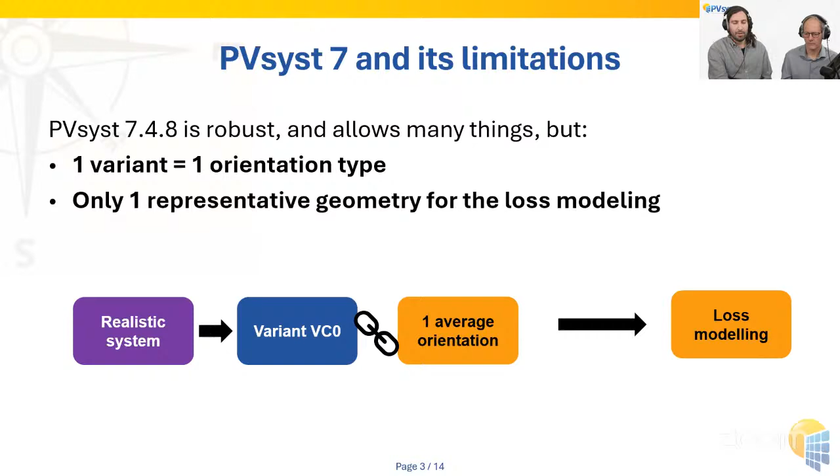And so for that reason, we may have had some inaccuracies due to this averaging, and this motivated us to develop version 8. The solution was rather simple: to allow for any number of orientations to be described in the same variant. This solves both problems. We can now model both trackers and fixed tilt in the same variant, or different types of fixed tilts and so on. We can also have more accurate modeling because each orientation is represented properly in the variant, and we can use that for the loss modeling.

So let's now look at this in practice. I'm going to bring PVsyst out and let's see with a project we prepared here.

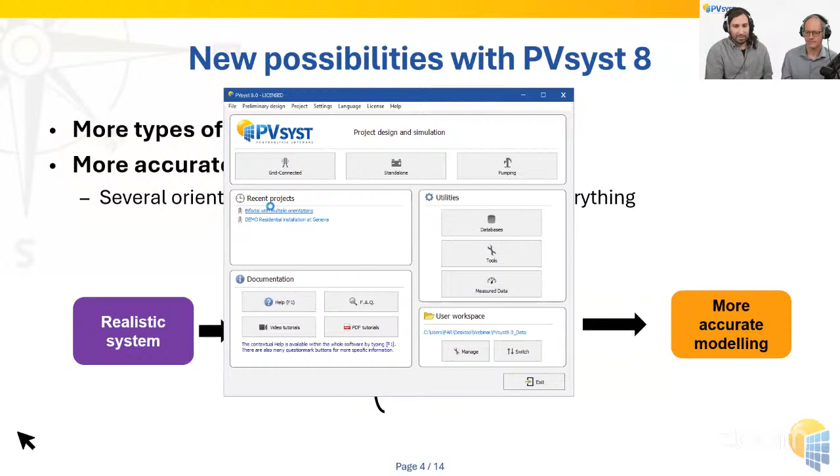And I'm going to open this first variant. All right, so first let's enter the orientations because that's where the main improvement is.

You can see that the interface compared with version 7 has changed a little bit in that we now have a list of orientations. With all the space that is here below, you can see that you could add many more, and there's actually no limitation to how many there are.

So here we have two fixed tilt orientations, which we can see at a glance. And to change the parameters, you can just unfold and enter any parameters here. Here, these are grayed out because I have a 3D scene that's linked to this orientation.

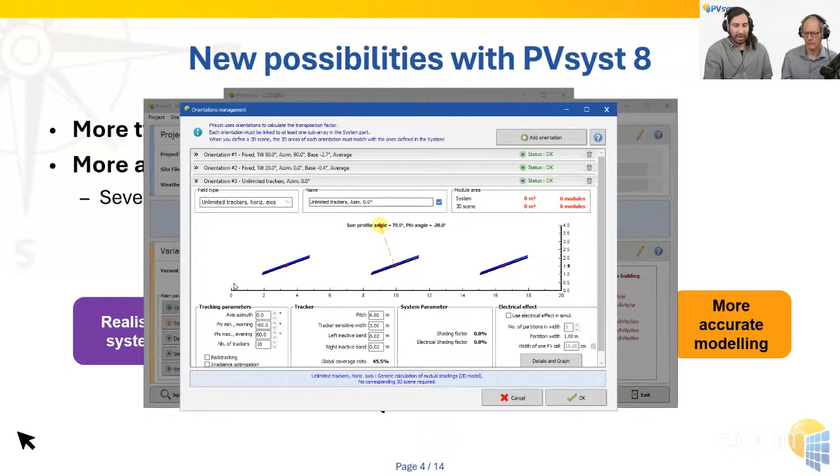So the nice thing about this is that I can very simply add an orientation. And here, since I had fixed tilt, let's add trackers orientation, for example. And here I have no problem, I can change the different parameters. And let's add backtracking, for example, and press OK.

And now I would like to show you a simulation. So just to complete my system, I should define which modules are on this tracker orientation. So I'm going to go to the system.

So here, for PVsyst 7 users, you will notice that the subarray list is on the left. Let me just copy one of these subarrays, which means I will just copy the definitions of the modules and the inverters. So I have my third subarray, and I can now select the trackers orientation.

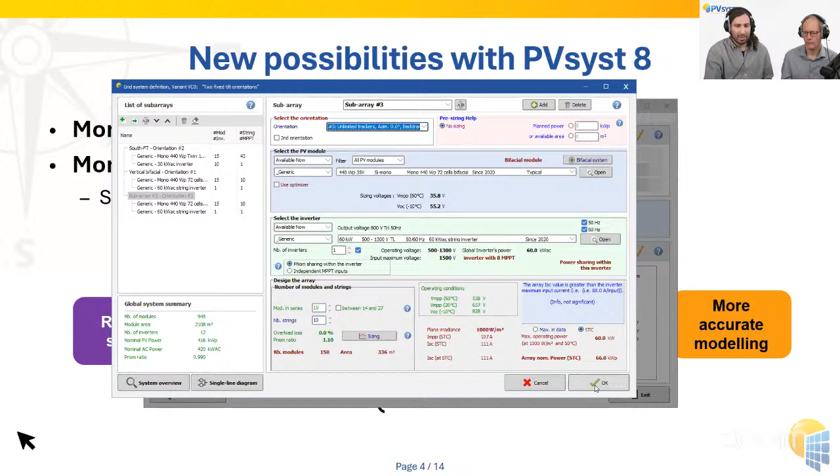And so with this, I'm ready to go. I have a module, an inverter, and strings, which are defined for every orientation. And I can just run the simulation.

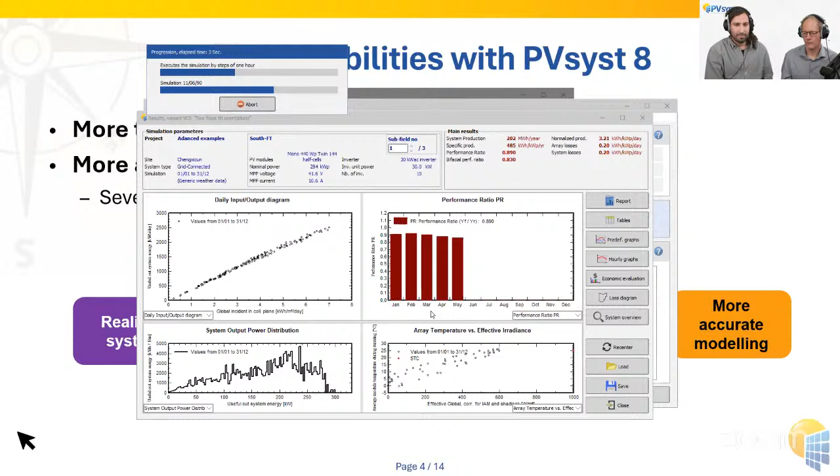And so what I did here, you can do with any number of orientations. Every time you have a new orientation, you can basically have new parameters. So you could imagine many differences, for example, electrical differences or differences in the 3D scene and so on. So now if you check the report, all those differences will be described.

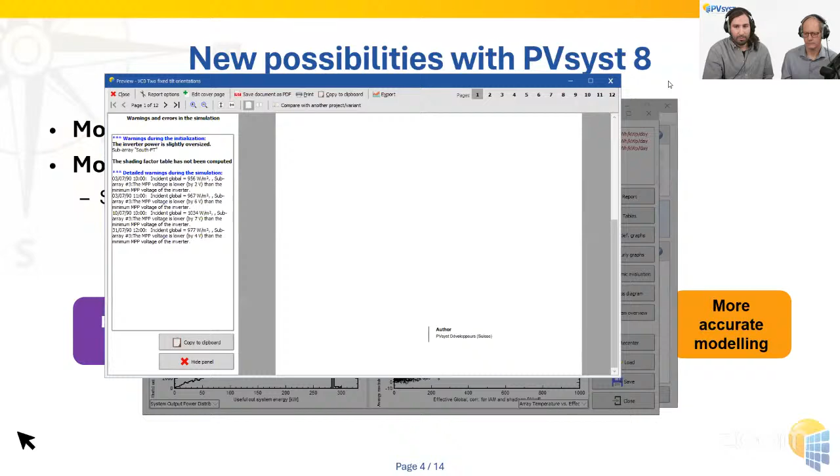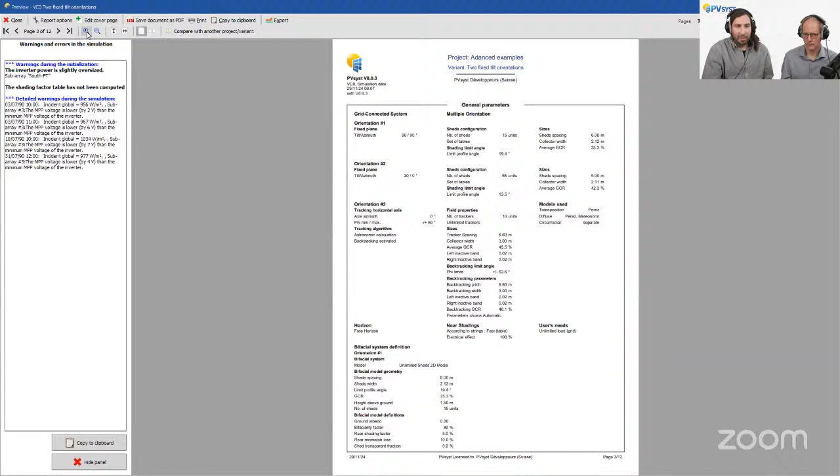Let's go to page number 3. Let me zoom in. Here in general parameters, you will have the different orientations being displayed with their respective parameters.

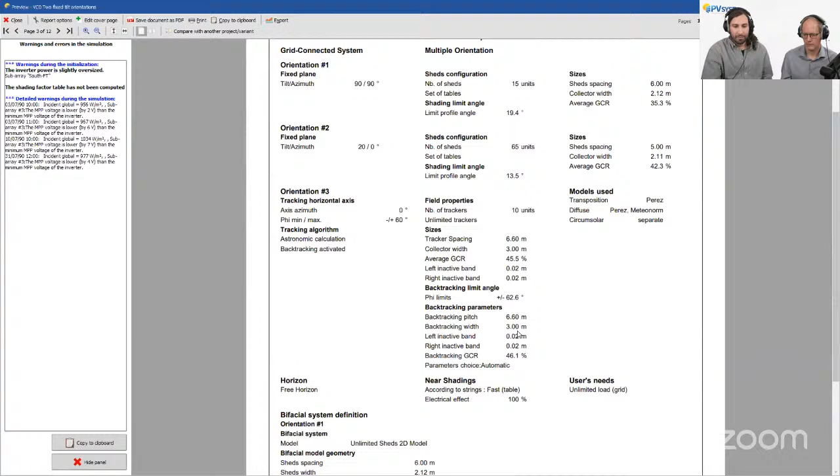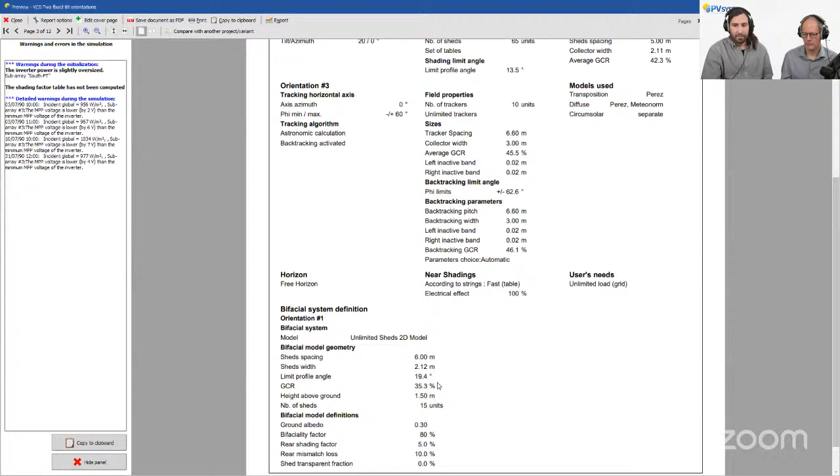If you have bifacial models, which you may have one by orientation, those will show up also here at the bottom. And then if you look at the shadings page, you see that you have an iso-shading diagram for each orientation.

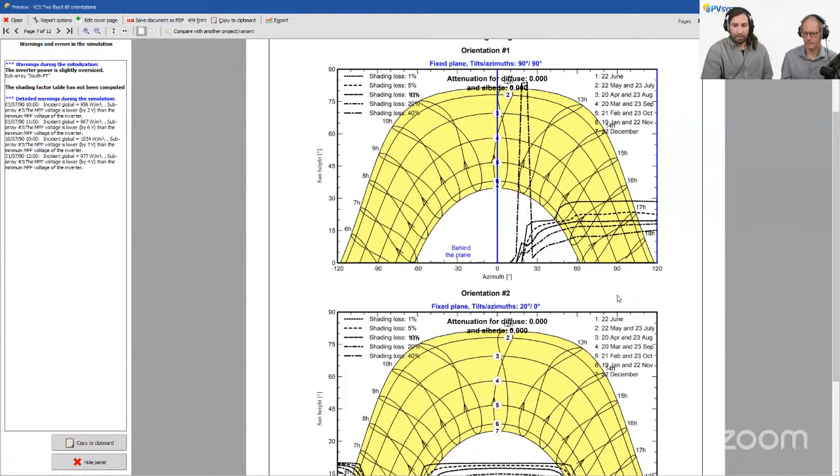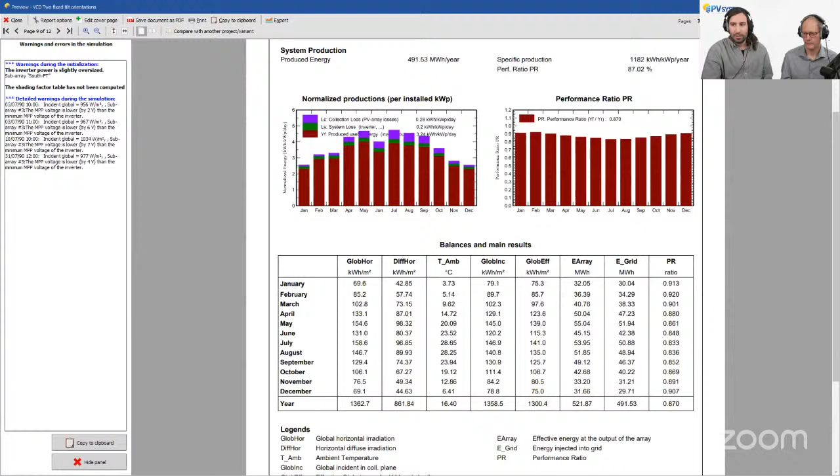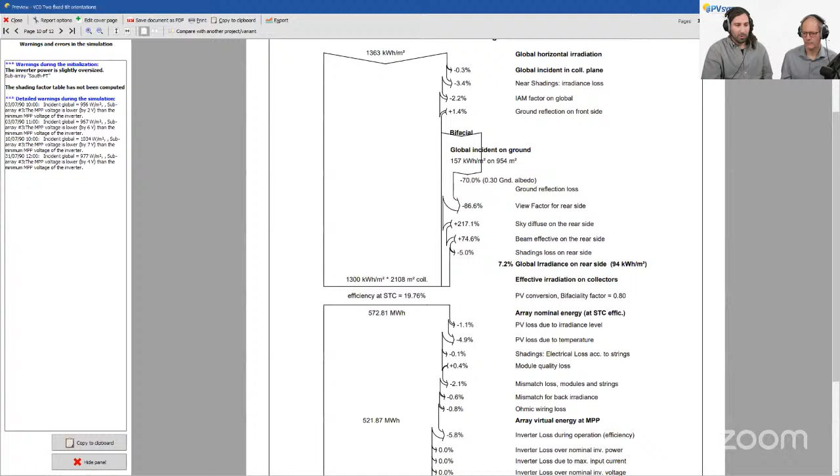Finally, the results are aggregated for the whole system. So this doesn't change, and we will properly sum everything up to give you the total loss diagram. And so this is just a simple example of how we can add multiple types of orientations. And this is a thing we could not do in version 7.

So now let me just go through a few more examples to show you the versatility of this. I don't need to save this. I'm going to go to this flat roof, which has 6 fixed tilt orientations. And I'm going to show you the 3D scene.

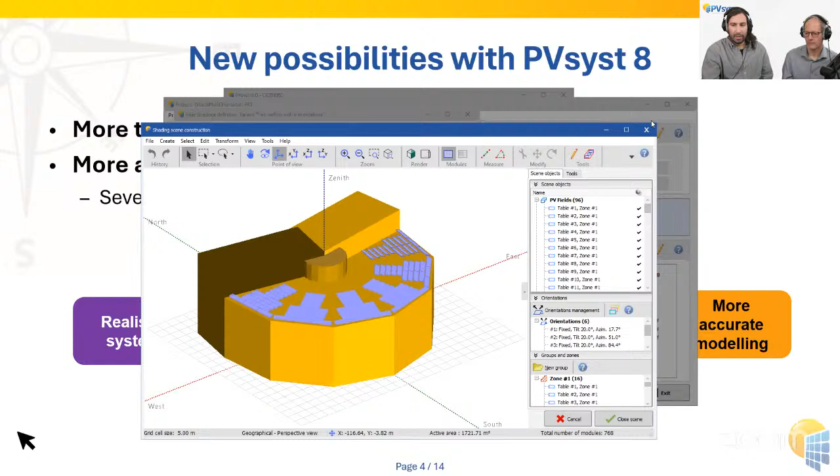So you have one building and 6 arrays, and those are all bifacial arrays. One of the limitations of PVsyst 7 was not being able to have multiple types of orientations and a bifacial model associated to it. We were in fact limited to only one bifacial model. Whereas here, we can look at the system page.

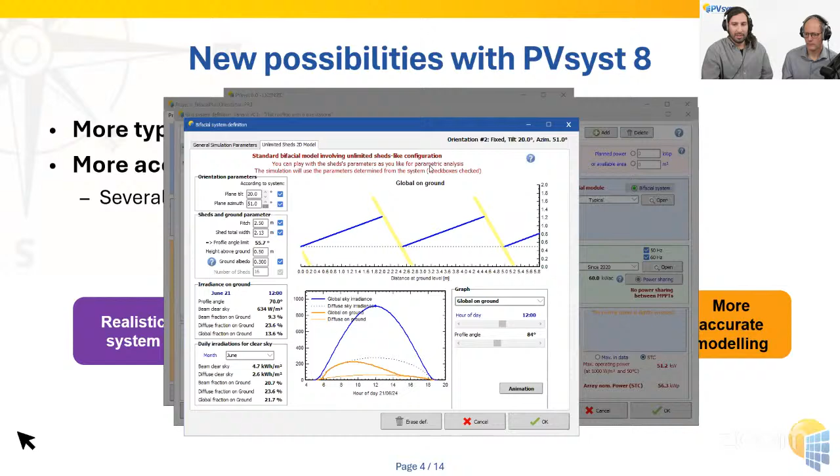And you will see that each orientation is assigned to a subarray, and each time we have a different bifacial model. So this is the orientation, has a specific azimuth here. And if I go to number 2, I will have pretty much the same orientation, but a different model and a different azimuth. And so like this, we can gradually add more bifacial models to the project.

I will show you a second example.

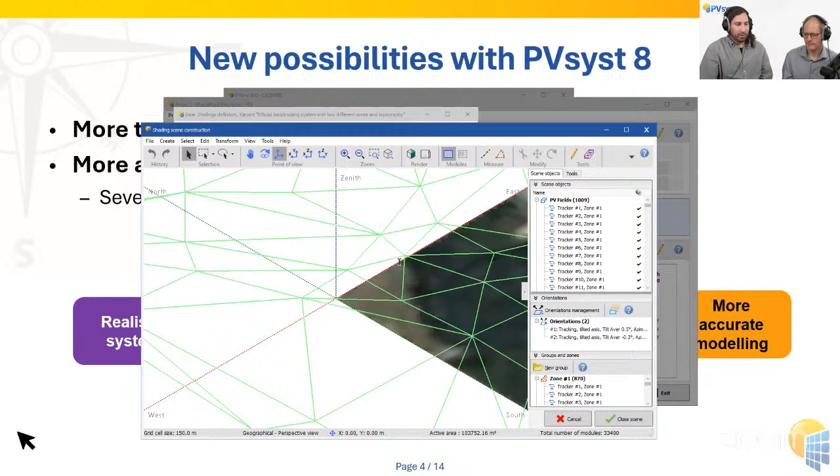The wider pitch here. And if you want to do backtracking, you would prefer that this move independently. So for this reason, even though they're the same type of trackers, we define two different orientations.

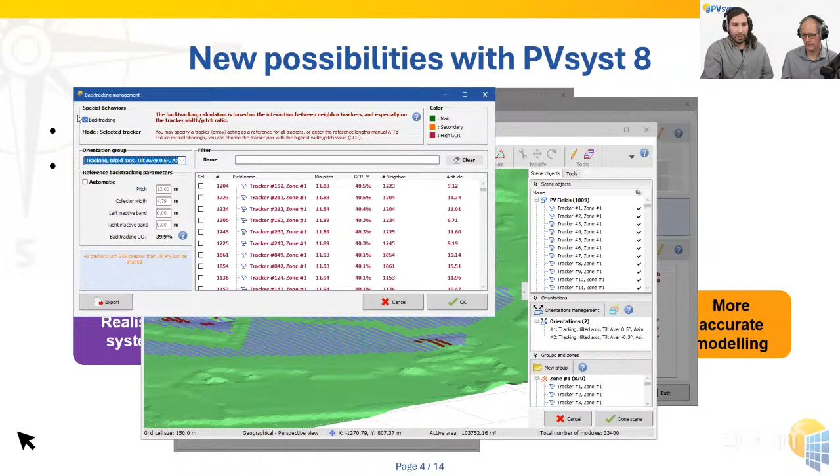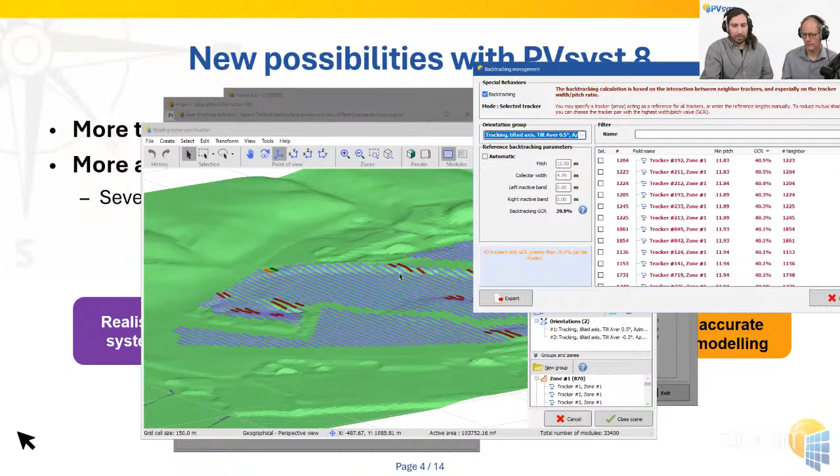If we go to the backtracking management, you will see that you can have different parameters for each of the orientations. Another possibility that was added is that, given certain parameters, for one of the two orientations you will see which trackers have a lower pitch and have some increased risk of being shaded. Of course, with the topography, there will be some shading due to the topography, but the one due to the pitch will be highlighted in red.

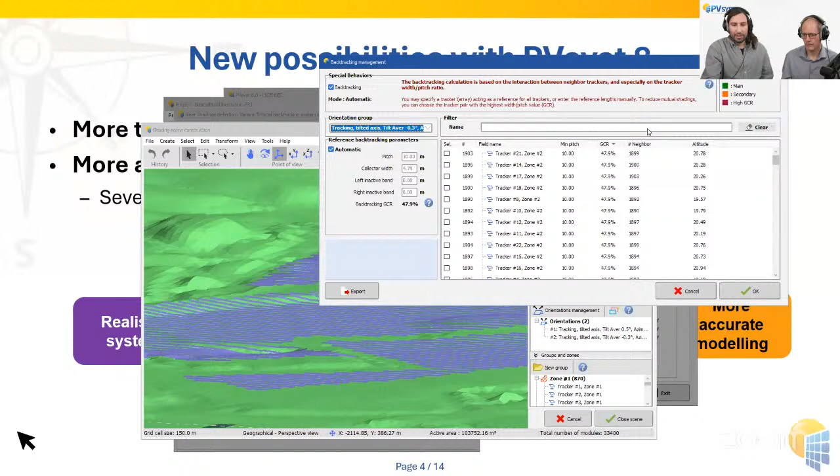And now I can swap to the other one. And here, yeah, here everything has the same pitch property. So this is another possibility that was just introduced with version 8.

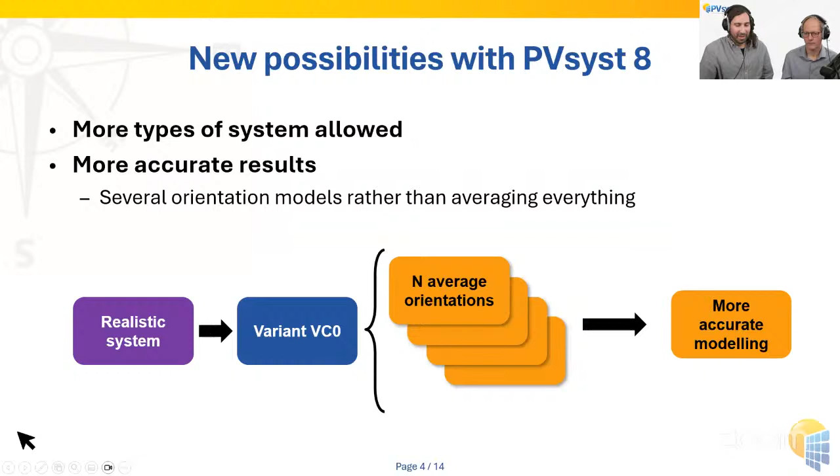Now, of course, there are other developments with version 8, and I will go through 3 directions. In the next 2 slides, I will describe first how we tried to make the simulation more accurate. Second, how we made general quality of life improvements to the interface. And third, something I will just mention here, is that we keep updating our component databases, our weather databases, and so on.

So PVsyst ships with Meteonorm 8.2 now, so you can always find more optimizers, inverters, modules, and so on in our database. For all improvements, if you're interested in the details, you can look at our release notes on this webpage. You will also be able to experience the new interface for our help.

Let me first describe how we make the simulation more accurate. The main improvement here is a new so-called sub-hourly clipping correction model. The idea is that high-frequency irradiance fluctuations can lead to some clipping losses that are not seen by a traditional hourly simulation, meaning we're basically missing a few losses, especially for small arrays. The solution was to consider more high-frequency time series.

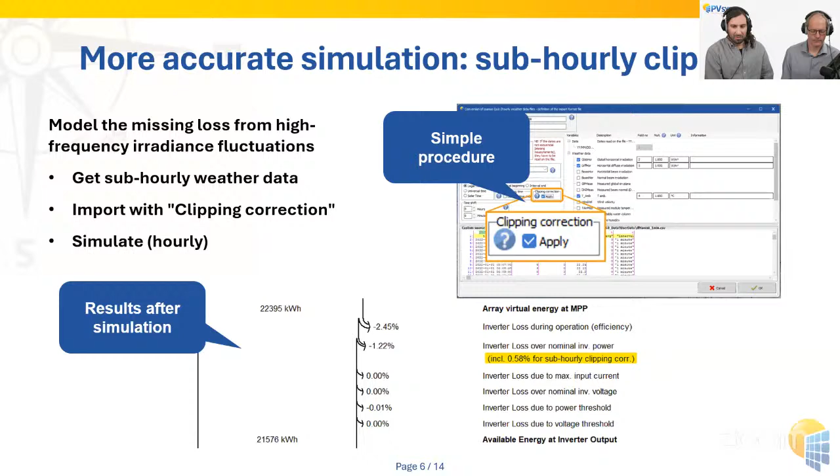Now I will move to the interface and quality of life improvements. Two examples here are the topography and satellite image import directly from the 3D scene, which I will show in a minute, and the second is the newly designed help, which is much more easy to read and to search. We're looking forward to having your feedback on that.

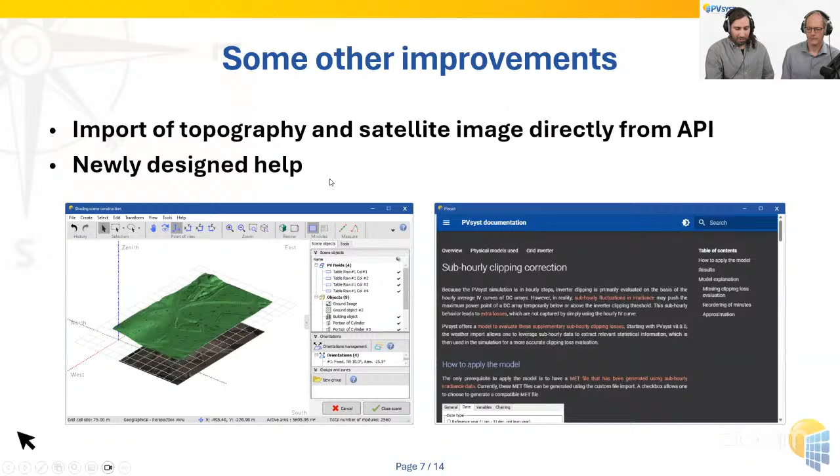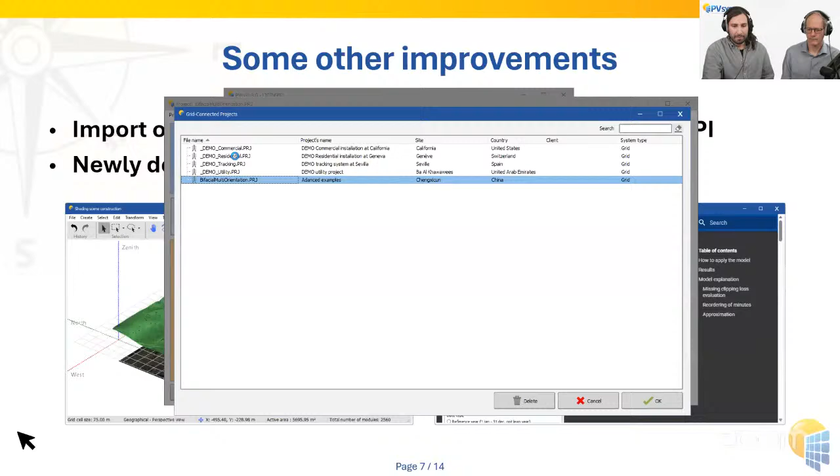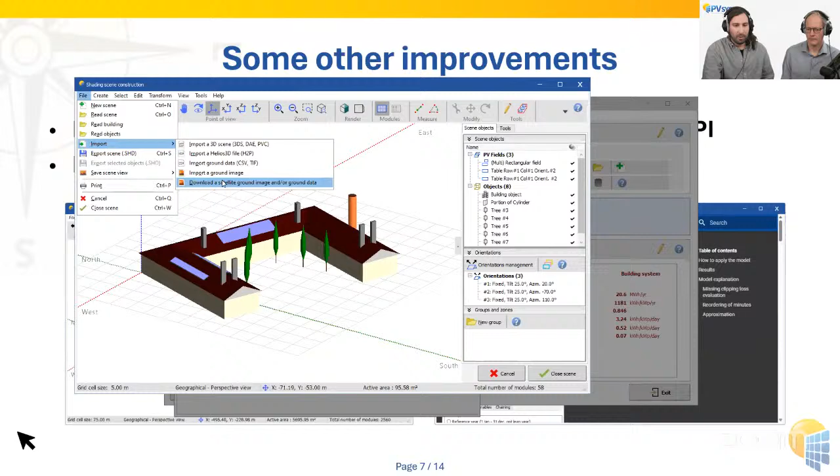I would also like to show this within PVsyst. So let me open another project, the residential one. Here you have simply a house, but what counts is that we want to import some topography for this location. I will go to import and download the satellite ground image and topography, and I'll try to choose a place where there is a hill so I can zoom in.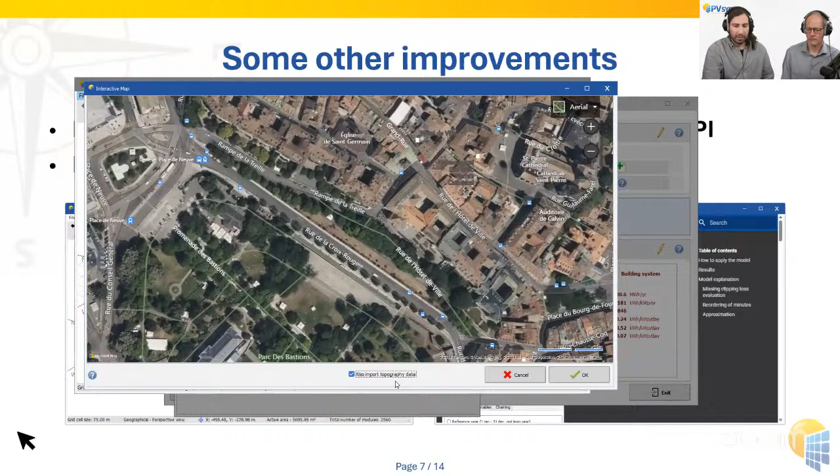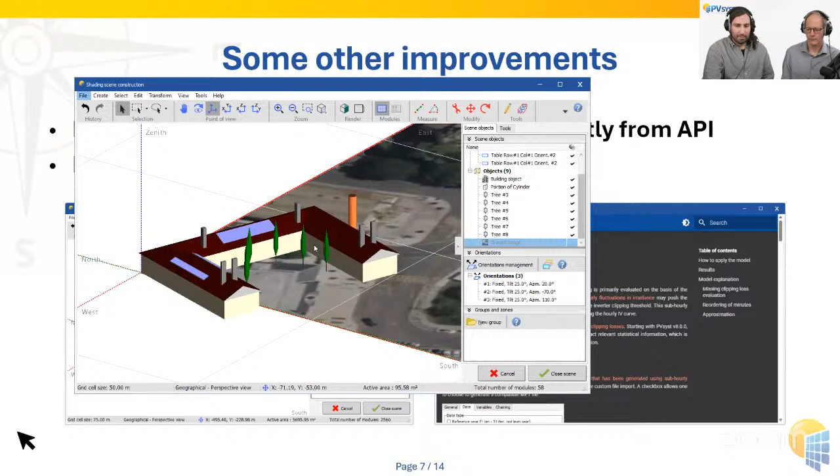If I want to import the topography data on top of this image, I just need to check here on the import topography data, and this will take just a couple of seconds. And there you go - now you have a topographical layer that was imported with quite some detail. Then you can start designing your scene as you would do. So that's the first improvement.

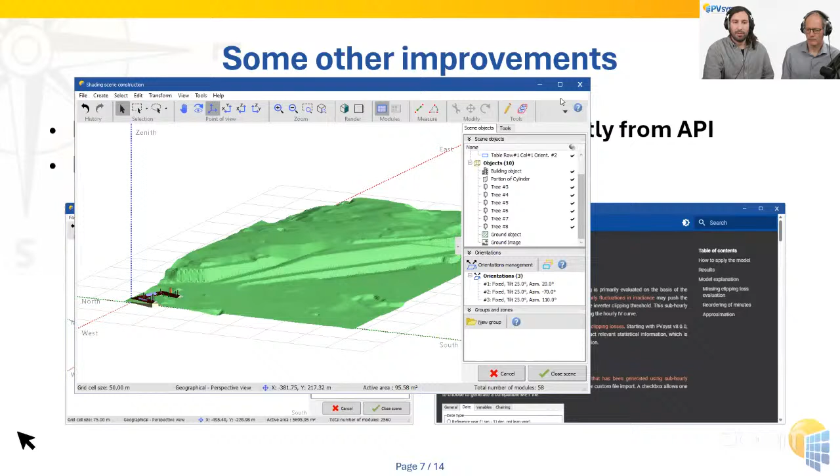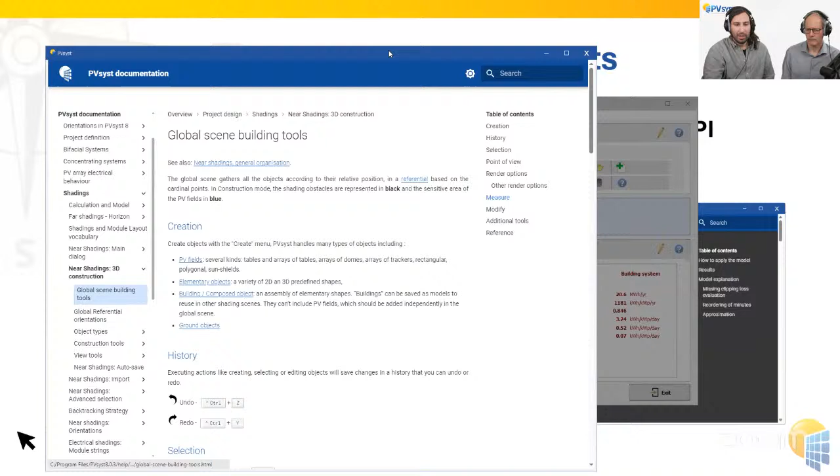And then just to show you the help - we have, I just pressed F1 to open the help. So we have this newly designed help with the search bar that's a bit more usable than before, and a dark mode for those who like it.

I'm at the end of my part. Just to summarize, we are at version 8.0.3, so feel free to update. Basically the first few patches were mostly crash fixes, so now this version is much more stable - be sure to update. And if you have a PVsyst 7 license, this is carried over to version 8.

So you don't need to do anything about that. You can just download PVsyst 8 and keep working.

Within PVsyst 8, the main changes are the multiple orientations, which opens up a field of possibilities, the sub-hourly clipping correction, which makes the simulation more accurate, new tools in the 3D, and PVsyst CLI, which Bruno will describe now.

Thank you very much, Michele, for this nice description. So I will take over now and say a few words on PVsyst CLI, or the PVsyst command line interface,

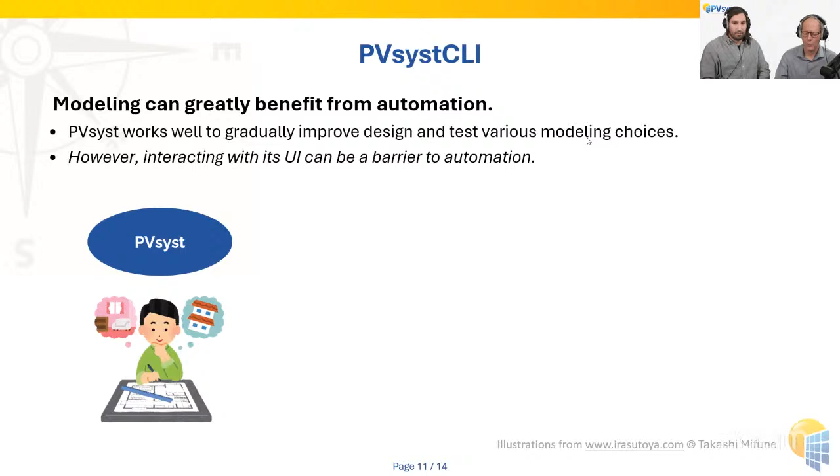And the idea is now that this barrier of the user interface to integrate PVsyst into an automatic workflow will be covered by PVsyst CLI, the command line interface.

So the command line interface will allow you to perform certain operations of PVsyst without using the graphical interface. You just type a command line on a terminal, and this will trigger the execution of PVsyst in the background. And this, of course, will open the possibility to integrate PVsyst into an automatic workflow.

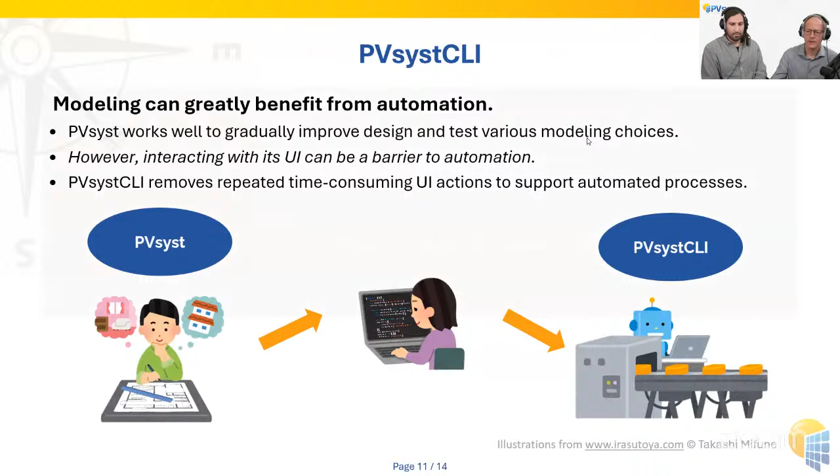So how does this look like in practice? It is simple. If you have a terminal window, you just type commands in there, and I will run you through an example right now.

So if you get updated weather data, it's not necessary anymore to manually open PVsyst, import that data to create the so-called MET files, the MET files with the MET extension. This can now be done automatically via the command line.

And the second functionality that was built into PVsyst CLI right now is to run a simulation. So you can run the simulation without using the graphical interface, you can do this with the command line. And this will be the first example that I will show to you.

So as Michele has already said, the PVsyst CLI is installed together with PVsyst 8 when you install it on your PC, alongside the graphical user interface, and you can try it out. There is a trial period where you can just use it,

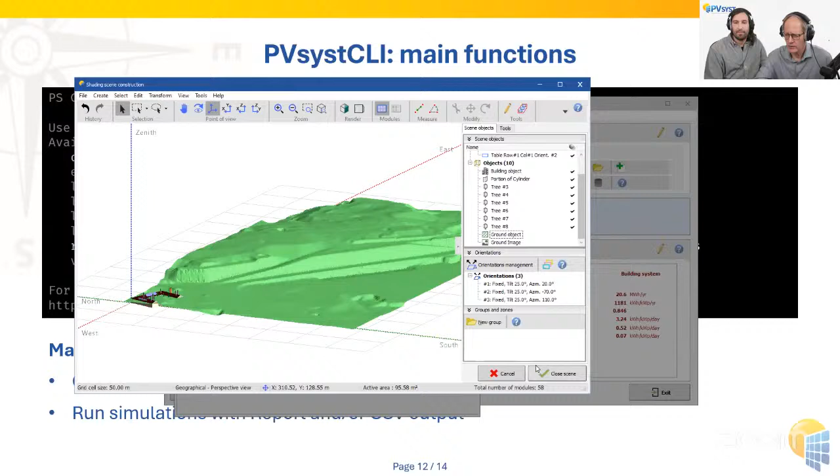So I'll be going back to PVsyst and show you, we'll just close the windows that Michele opened and get you back to the starting screen.

So if you want to run the command line interface, basically you need some pre-existing PVsyst projects and a PVsyst workspace on which you do these operations via the command line. And I will do this example here right now with the workspace that we were using for these examples.

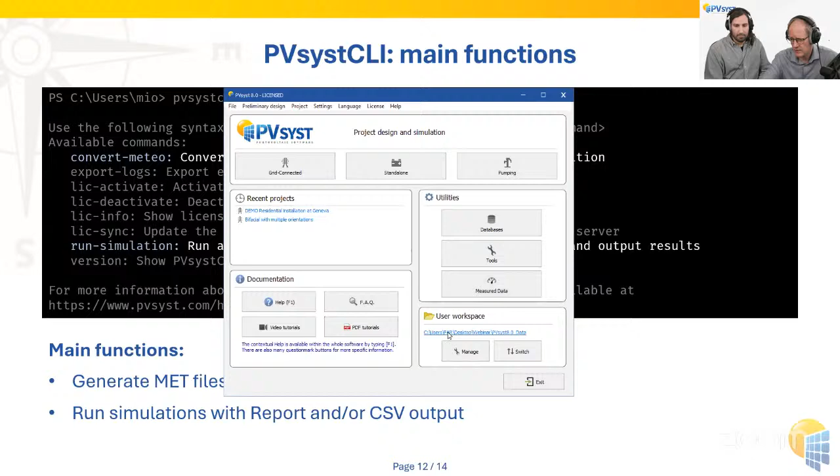And on the starting window of PVsyst, you have this link here to the Windows Explorer. If you click on that, the Windows Explorer will open and show you the workspace of PVsyst with all its projects. So the projects are in this project folder. We will use that in a second.

And the weather files are here in this Meteo folder that you can use. There are many other folders. I will not go through the details right now, just to say that I will be working on this folder on our disk where our workspace is.

So if you open the terminal on this window, I have it here. This corresponds to the workspace that we are seeing right here. And the first command is very simple. You just type PVsyst CLI and hit enter, and this will be installed on your computer. You can run it.

If you just type PVsystCLI, you will not do any action. You will just get the list of available commands that are possible with PVsystCLI, as you've seen on the slide I've shown before. The two commands I will use for our example are convert Meteo and run simulation. The other commands basically do license management and show you the current version that is installed.

You also see that there is a link down here to the help of PVsyst CLI. There's a specific help environment for explaining this command line interface. In principle, you can open this in a browser and get to a help page which explains it. The help is also installed locally, so you don't forcibly need an internet connection to see this help. You have it installed locally together with PVsyst.

So I want to run the simulation, and in this first example, we'll just execute a simple simulation and create the PDF report, but without using the graphical user interface of PVsyst.

So the simulation is hopefully finished. I think it might take some time if it's the first time activating the PDF generation.

Okay, let's give him some time. We'll say a few words. Let's give him the time to install the PDF converter, which was not done on this PC.

I'm sorry for that. But basically, you see here the most elementary way to execute a PVsyst CLI command and run a simulation without the need of using the graphical interface. And this is basically the idea.

Of course, in reality, you will not be typing manually commands on the command line to execute PVsyst. The true power of this feature is that you can integrate this now in different scripts that automatize your workflow. You can use PVsyst CLI as PVsyst is always installed on Windows, so you need some Windows environment to execute scripts. But you can use Windows batch scripts, Python scripts, R scripts, many types of scripts just to invoke this PVsyst CLI command.

And we see here now that the PDF generation finally ended. And you see here now in the folder where I was working, there is a PDF report, and I can just open it and see the PVsyst CLI report for the variant VC0 of the project that I had selected.

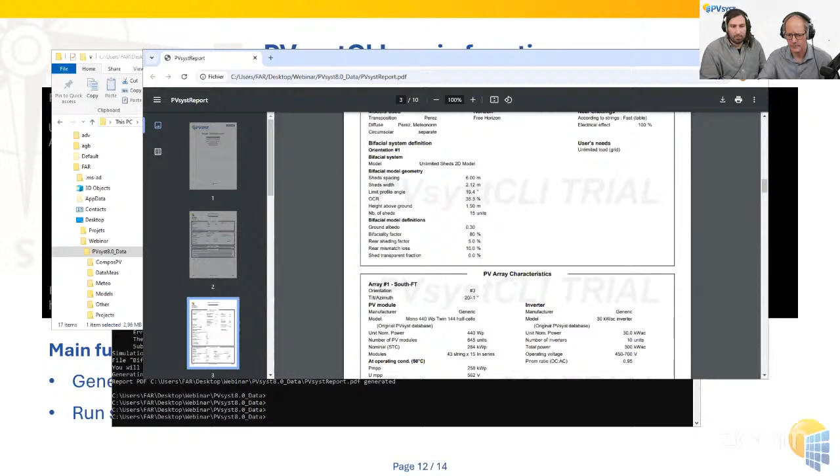So as I was saying, the idea of the command line is not to type in the commands manually each time you want to do something, but to integrate them into scripts.

As a possible use case, we have thought of the possibility of running a simulation on updated weather data. So the scenario here would be that you have an existing PV system, you have your PVsyst model that describes your PV system, it's operating, it's monitoring data, it's measuring the weather data and the PV generation. And basically, as the weather data is coming in, you want to update the simulation results, either to compare them or to see if the installation is operating as expected.

So PVsyst CLI can do this in 2 steps. The first step would be to import the new weather data and convert it to the PVsyst format. And the second step then is to run the simulation with this updated weather file.

This is a slightly more complex example than what I've shown you before. To exemplify this, PVsyst ships with several examples where we have scripts that you can look into that give you different use cases, and this is one of them. I will quickly show you how you can do that in PVsyst so that you can start exploring and changing these examples by yourself.

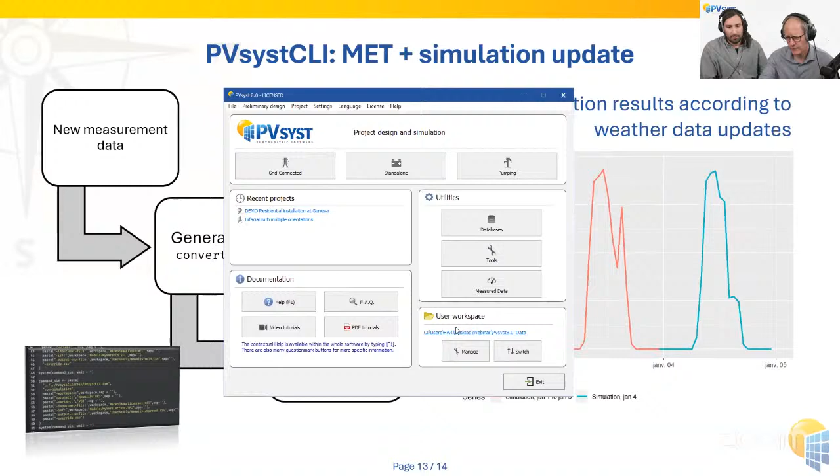So I'm going back to PVsyst. In our workspace, if I open it with this Manage button, I see the folders again of this workspace, and there's a workspace called PVsyst CLI demo. This is where we have put some examples for you that run out of the box in principle. Every data that you need to run these examples will be there. But right now, in your default installation, these folders will be empty.

And to populate them, you have to click on this Reload Templates button here. If you do that, PVsyst will simply populate these folders, the templates folders and the demo folders with its templates. So in the templates, there are weather file templates and load profiles. But what's interesting for us here now is this PVsyst CLI demo, and you see now that there are many files in here for different examples.

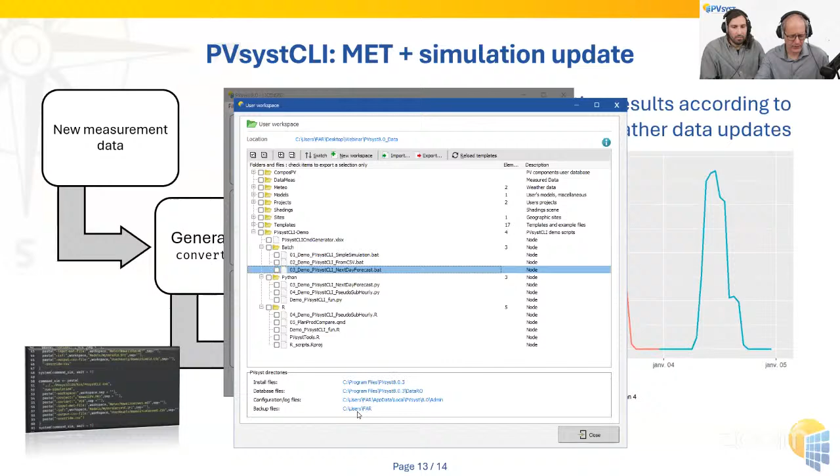There are 3 examples for Windows batch files that we can run. And this is the example I will show you, this next day forecast example. But you also have more complex Python and R examples. So let's go back to our Windows Explorer. And you see now that there is a new folder called CLI in here with all these examples that are in there, and we will look into the scripts of the Windows shell with these 3 examples.

The first one, the simple simulation, is basically what we did right now by hand. We could do it in a single go. And I will show you this next day forecast script. I will open it. Here you see it.

If you're not acquainted to Windows scripting, let me just say that the command sets environment variables. In this case, these are the paths and file names that we'll use for this command. And then we check if these folders for the results exist. And the true PVsyst CLI invocation comes here at the end. You see that there are 2 commands which invoke the command line interface. The first one does a weather file conversion, and it needs a site for which the weather file is defined.

This needs to be done beforehand in PVsyst, using the conversion format with file extension MEF. This is a file used when you import custom weather data in PVsyst; it describes where PVsyst will find the columns for the different types of variables in the CSV files. You need to prepare this format file beforehand for your monitored weather data.

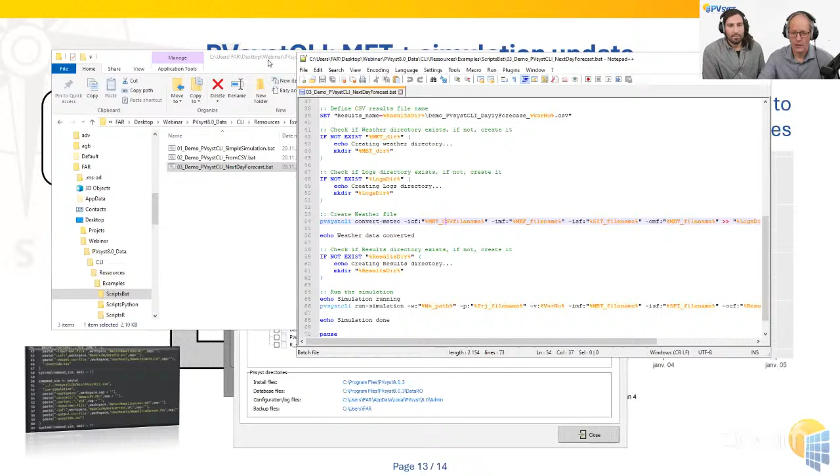Once you have that, with this simple command you will generate a MET file, the internal weather data file format of PVsyst. Then in a second call, this script will run the simulation with the new weather file created in the previous step. This is now a long script that can be executed automatically.

I just double click on this, and you will see all these steps are now being executed automatically. This is an example of an automated workflow: if you have an existing PVsyst project for your installation with a site file, and you've prepared the format file for your weather format, you can continuously integrate new weather data into the results.

You see the simulation has finished, and there is much less output than before. This is because you can control the verbosity of the output on the command line. You can have a lot of feedback with many information and warning messages, or you can execute very quietly. You can also redirect all these messages from the command line into log files, which is what happened here - that's why the screen is quite empty. All the results were routed into log files, which I will show you.

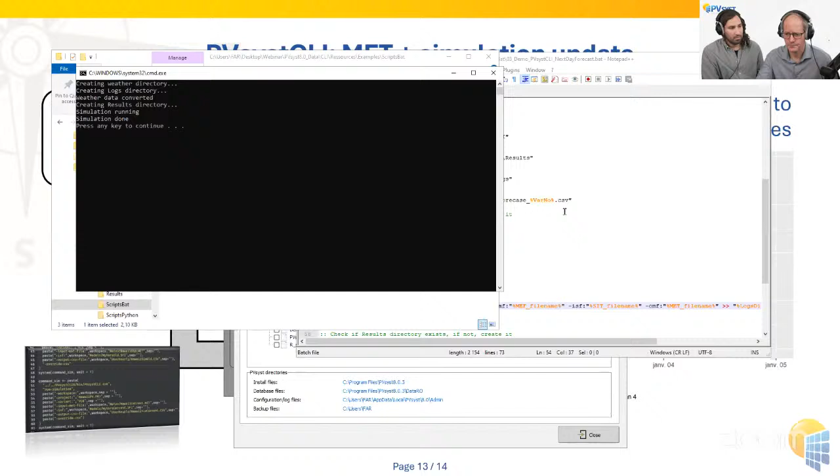In this example, we have the results here - from the file we were just executing. You can see the simulation logs and the weather import logs for the two command line interface commands we executed. You can quickly open this to look at it - it's basically what you saw before on the terminal when I executed the command manually, now written into a file for further reference.

This is important: if you fully automate your workflow, you won't be looking at the terminal while these things are executing. You need to find all this information later in a log file.

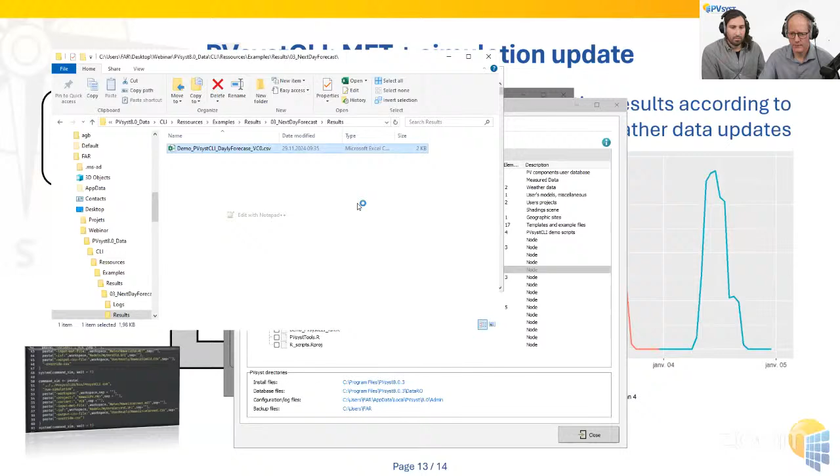The second result is the CSV file - the hourly simulation results of PVsystCLI from the simulation we just executed. It's a regular output file you can already create with PVsyst. If you go into advanced simulation output file, you can create this kind of CSV file output. For the command line interface, you can also configure directly what you'd like to see as output in these files. I won't go into detail, but in the help explanation of the parameters for the run simulation command, you'll find all the parameters that control the output.

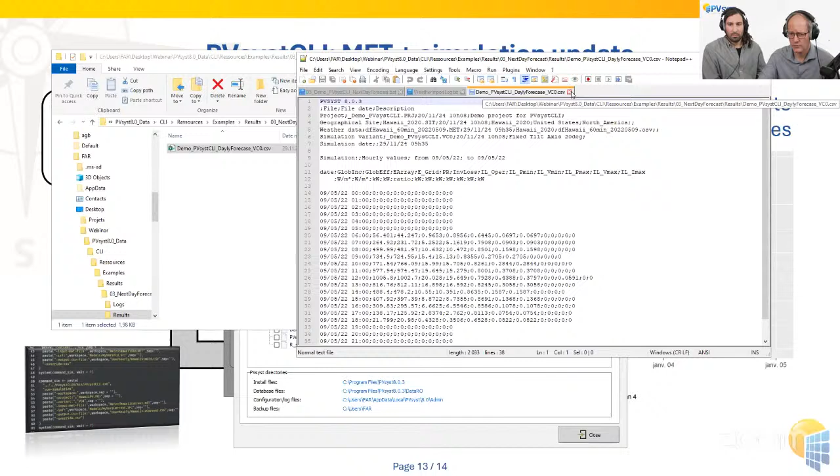We didn't generate a PDF report for this example, though we could have. The only other thing we generated in this example is the weather file, the MET file, created with the first command line interface command.

So you see it's possible to make a slightly more complex scenario like this one in a fully automated way. What we did was take 3 days of simulation and add a 4th day with incoming data, generating simulation results for the complete weather data set.

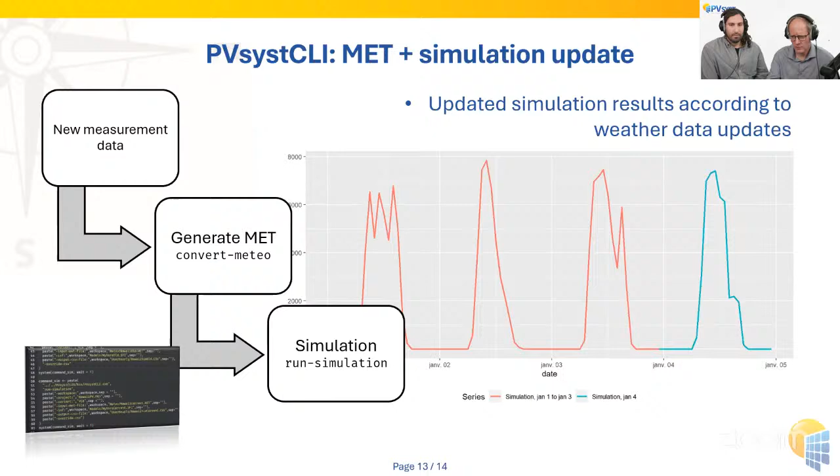So this is one use case that could be interesting for using the command line interface. Another one is slightly more complex - I will show it to you on the next slide.

Right now in PVsystCLI we have hourly simulation steps. The step to sub-hourly simulation steps will come in the next major PVsystCLI release, 8.1. But up to now, there's a possibility to do a sort of pseudo sub-hourly simulation by splitting your input weather data into slices of minutes, creating yearly files for just 1 minute in the hour, running 60 simulations on these slices, and then reassembling the results into a minute output file. You see the result of such an exercise here on the right side.

If you do that manually, it's quite time consuming and error prone. PVsyst CLI would be the possibility to automatize and simplify greatly this exercise. In fact, with the examples that come with PVsyst, this scenario is also there in a slightly more sophisticated script which uses Python.

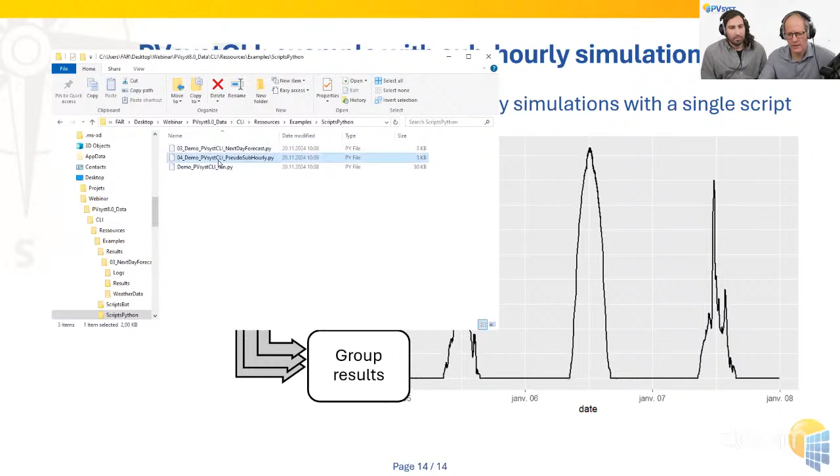In these Python scripts, we have 3 examples. This next day forecast is the same that we did with the Windows batch, but with Python. And here you see a more complex script now that does the slicing into 60 individual CSV files, imports all the 60 files into PVsystCLI, converts them to MET files, and then runs a simulation of one variant on all these 60 files, and in the end reassembles the CSV output into one single minute file output.

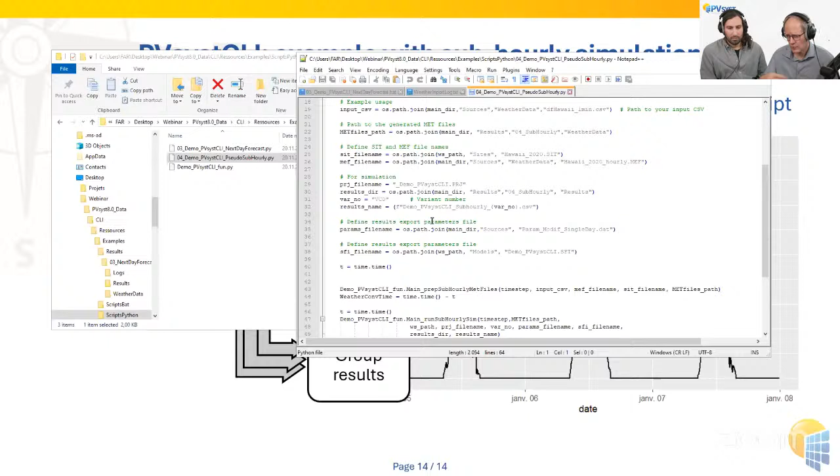So if this kind of scenario would be important for you, you can just take the examples that you find in here. If you use Python, for example, and adapt it to your specific project, to your specific files, and run it. This example also runs out of the box.

I will not do it here because indeed these are many simulations - 60 importing steps of weather data and 60 simulations that run. This would take quite some time that we don't have here. One strength of PVsystCLI now is that you are able to parallelize these 60 simulations. So in this particular Python script, this is already done. If you try this out by yourself, you will see that the 60 simulations will run in parallel, and will make use of all the cores of your PC, which speeds up things significantly.

You could do before in PVsyst these kind of sequential or many simulations in one go with a batch mode, but also the batch mode runs serially, not in parallel. And PVsystCLI now opens the door of using really the full potential of the cores that you have on your PC to run in parallel.

If you look into this example and try it out, anyhow, be careful because this will be 120 calls to PVsystCLI. So you have 250 trial calls, and you will use up 120 of them in one go if you just run this example. So think carefully before you just start doing this. If you want to use your trial calls for more things else, you will have to buy a PVsystCLI license to go on using PVsystCLI on your environment.

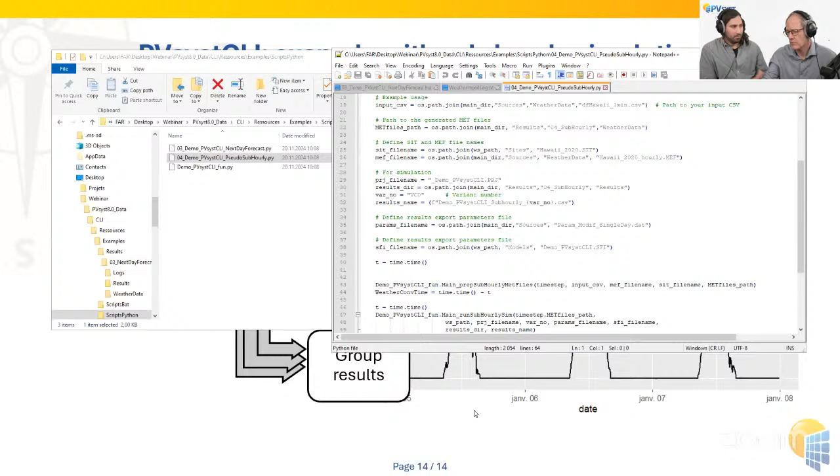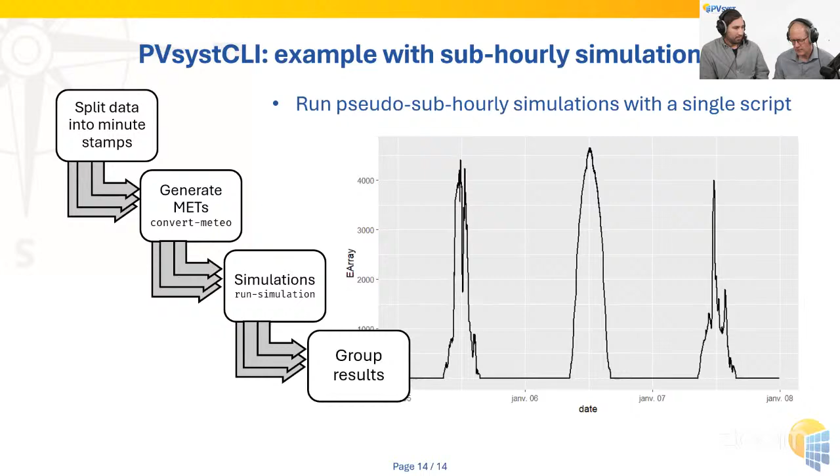And with this, I basically gave you a quick overview of what's possible right now with PVsystCLI. We are going to improve the features of PVsystCLI. So we have these two commands right now for importing weather data and running simulations. And the next step that's on our agenda will be to integrate PVsystCLI now with the PVsyst batch mode.

And this is interesting. First, it might sound redundant because you say the batch mode is to run multiple simulations and you can do this with PVsystCLI anyhow. But what you can do with the PVsyst batch mode that is not there in the command line interface right now is to change simulation parameters. So this will be the big plus.

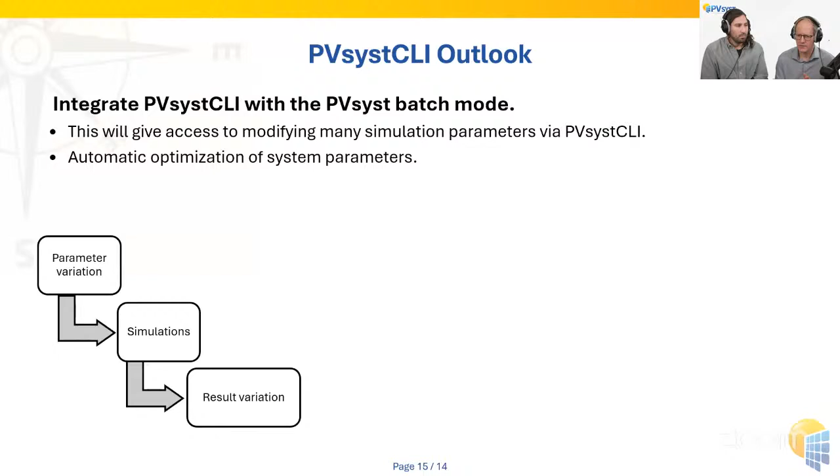If we integrate the batch mode with the command line interface, you'll be able to automatically change many simulation parameters via the command line to run simulations. And this opens the door for several possible scenarios. One would be an automatic optimization of certain system parameters.

For example, if you have a system with storage and you ask yourself, what is the optimal battery capacity and PV capacity for the system, you could execute a series of simulations where you vary the battery capacity and the PV capacity, and then, for example, make a financial evaluation to optimize the net present value or the return of investment or LCOE or any other kind of variable you would like to calculate.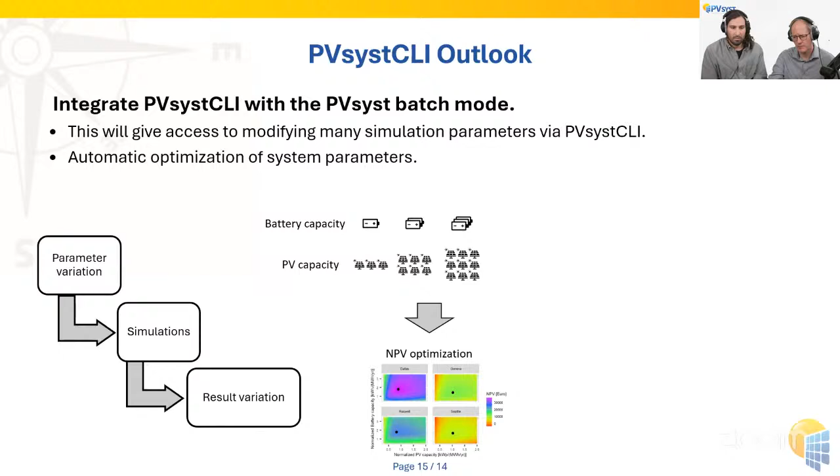So this is one possibility: optimize system parameters. There are many other system parameters in PVsyst that you could try to optimize in this way.

The second scenario for using batch mode with CLI would be to make a fully automated sensitivity analysis. How does the simulation result react to a change in some parameter? For example, you make a bifacial simulation, but you have uncertainty on your ground albedo. It's not a precise value, but within a certain range, and you want to understand how this propagates to the PVsyst results. With PVsyst CLI, you could vary the ground albedo parameter, run these simulations automatically, and get the yield uncertainty - the mapping of a ground albedo uncertainty to a certain yield uncertainty. This batch mode integration opens many possibilities for understanding the impact of changing simulation parameters on the results.

And with this, I'm done with my overview of PVsyst CLI. I thank you for your attention. I thank again Michele for his part. Thank you, and we will now take over for the question part.

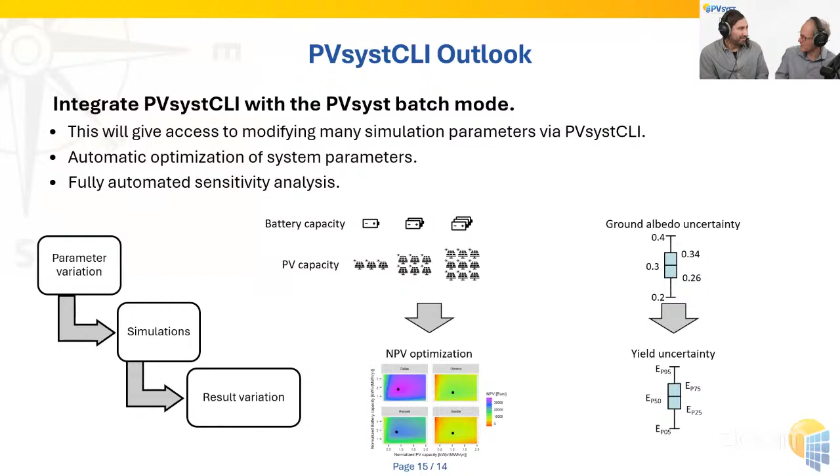Right, let's stop this. Our moderation team already answered some questions in a written way, but we still have some questions left for us to answer. I see there's a lot of questions that start with 'when.' I think we will maybe group all those questions at the end and answer them regarding the roadmap. But let's take a more direct one. Bruno, can you answer whether there is some sub-hourly export in PVsyst CLI?

If by export you mean simulation results, this will come once the simulation itself runs in sub-hourly steps. There is no way to take the hourly results and convert them or deduce some sub-hourly behavior from that. Right now with PVsyst CLI 8, you export hourly data as before. With the pseudo sub-hourly simulation example I showed, you can make a workaround and get something which comes quite close to sub-hourly simulations. There is the thermal inertia of the PV modules, which is not in there, and if you have systems with self-consumption and storage, you don't see the battery state of charge evolving. So these are scenarios you can't do, but any other scenario you can do this way and get a result very close to sub-hourly simulations. But the true answer is once we have 8.1, which is when we plan to have sub-hourly simulation steps, you will be able to export directly from the simulation the sub-hourly results.